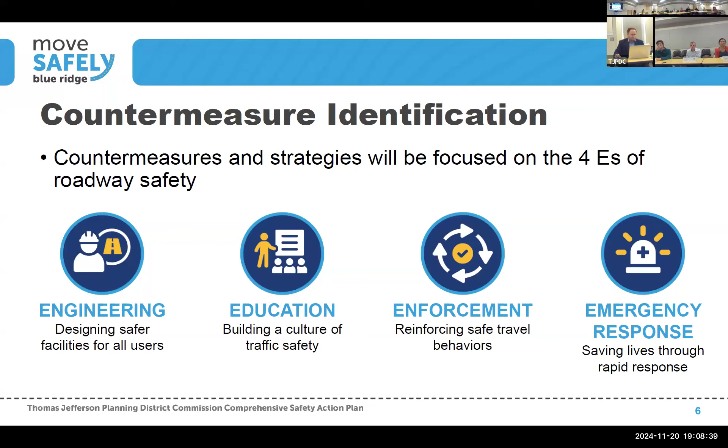The process is divided into 4 steps. The first step is identifying issues and opportunities. During the spring of this year, we completed this step through extensive public engagement. We conducted a survey that allowed residents of the jurisdiction to share their specific transportation concerns.

Step 2 consists of gathering data from site visits, which we conducted in each jurisdiction, completed in September of this year, so just recently. And now we're asking the public for feedback once more, but I will talk about this a little more in the next slides.

Step 3 will consist of development of targeted safety strategies based on the identified priorities in collaboration with jurisdictions. These strategies will serve as the foundation for the final step, which is the development of a comprehensive safety action plan, outlining specific actions and measures to enhance transportation safety in the region.

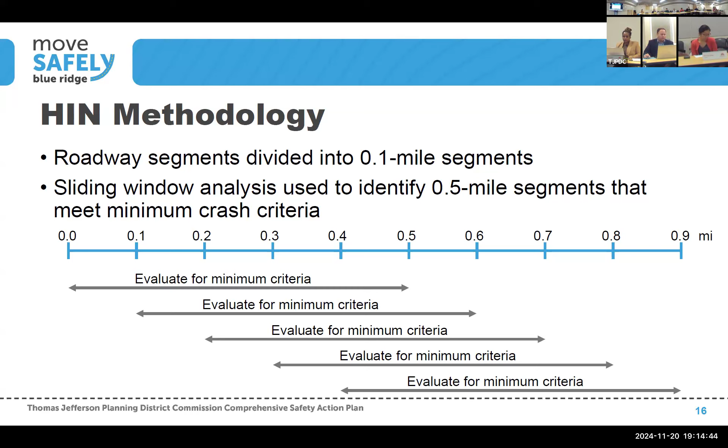In the next slides, I'm going to talk specifically about Albemarle and Charlottesville. But before that, I want to talk about what the terms mean. The terms you see on the screen are 2KA, 3KA, and then there's 2KAB and 3KAB.

What those terms mean is they refer to different criteria used to classify the severity of the crash in the high-injury network. Generally, 2KA crashes include K, fatal, and A, severe injury crashes, involving at least 2 or more crashes within a half-mile segment. This represents a broader and more inclusive network where more crashes are counted.

3KA includes K, fatal, and A, severe injury crashes, but limits the focus to 3 or more crashes within a segment. This represents a more narrowly defined network, focusing on areas with a higher concentration of severe crashes. The same goes for 2KAB and 3KAB crashes, but in this case, the B represents minor injuries.

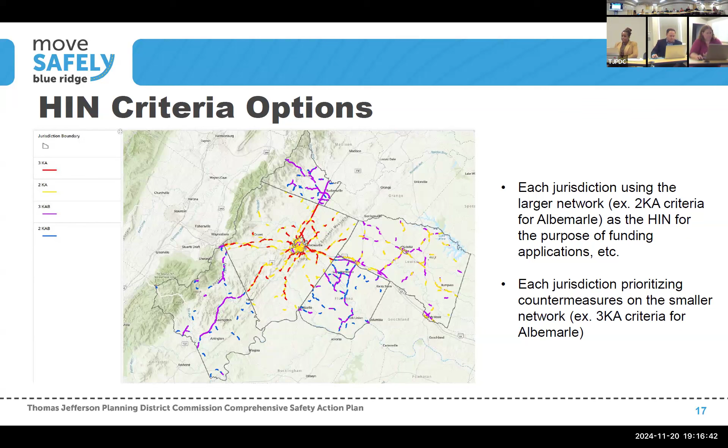We can look at the example for Albemarle County, where 3KA covers 3% of the roadway but accounts for 47% of the crashes, while 2KA covers 7% of the roadway but accounts for 72% of the crashes.

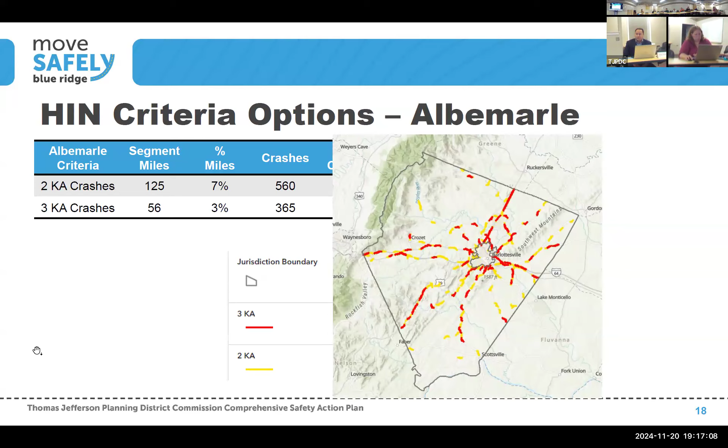Charlottesville is a little bit different. It does not have a 3KA. It has 2KA, but also has 3KAB. In this case, 2KA covers 14% of the road and accounts for 77% of the crashes, while 3KAB covers 17% of the road but contributes to 84% of the crashes.

I have a question. So here, each jurisdiction selects their own criteria for what's defined as a priority? Yes, I was not part of those meetings, but Sarah was. Those meetings were done with each jurisdiction separately, where both TJPDC, our consultant, and the jurisdictions agreed on which criteria they would use.

So in the Charlottesville case, is there any overlap for segments that are both 2KA and 3KAB? It seems like there could be segments that qualify for both categories. They're not mutually exclusive, right? They do overlap. But then what color would they have been coded? That's a good question. Unfortunately, I don't have the answer at the moment, but I can follow up on that. Well, all 3KAB crashes would be 2KA crashes, right? Well, they're not.

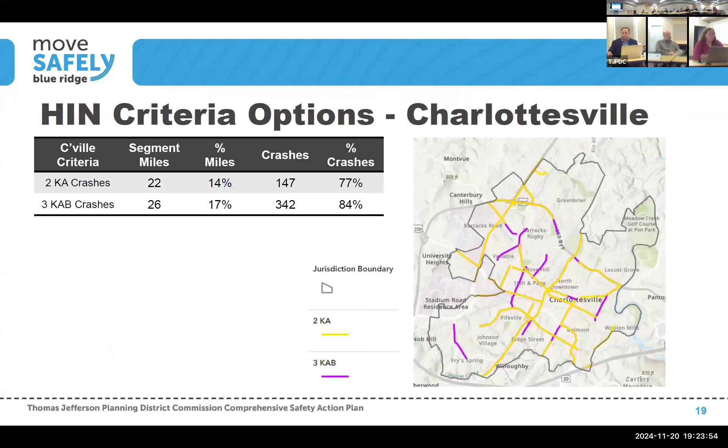How much of this framework is driven by the funding? You said this needs to qualify for, I think, Bipartisan Infrastructure Law funding. Yeah, so the goal is to give future opportunity for implementation grants, based on the comprehensive safety action plan. At the end of this plan there are certain deadlines: we have to have the draft safety action plan completed by the end of April, reviewed and finalized, and then by June 30th it has to be approved by the boards. Then by the end of September, we have to submit the final action plan to FHWA.

And a follow-up question, if you don't mind. With that in mind, how much does this effort overlap with parallel efforts in each locality? Or is this basically what carries the water for broader efforts like Vision Zero and pedestrian safety? Are those in parallel, or is it like a Venn diagram, or does the other thing not happen?

Okay, currently we're looking at two studies, or three studies, in the Charlottesville MPO area. One of them's in the city. Let me go down the list.

The first one is the Hydraulic 29 Emmet Street interchange, right there, where we basically haven't studied that. It's been studied before, but we didn't study it with the Solutions 29 package of projects. So we're pulling that out as a separate study.

We're going to look at it to try to see what we can do to solve that issue at the interchange. We also had to pull the Angus Road intersection out of the previously funded study, so we're going to look at that again. And we're also going to look at Hydraulic and 29.

We're also going to look at that corridor from Barracks Road all the way through Hydraulic. That study shows up as a high safety need corridor, so we want to look at that to see what we can do to try to address the multimodal aspects of that corridor, to see if we can provide any recommendations for improvements.

The second corridor is from Hydraulic north to Woodbrook. Greenbrier and Woodbrook are two very high crash locations, as well as there being a number of high priority, high crash location segments on that corridor that we want to look at to see how we can come up with a method for improving that.

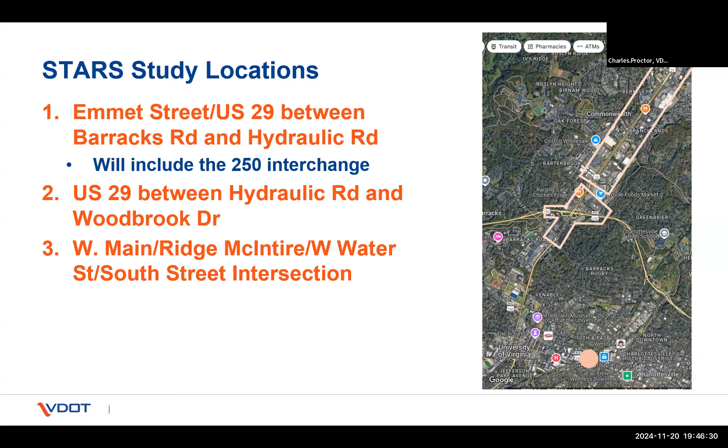In some instances, almost all the way to Old Ivy Road, which is significant. So we want to figure out how we can better solve that issue. This is also one of the locations the county was considering looking at for the Safe Streets for All grant. In talking with them, they're mainly looking at more short-term, low-cost solutions, whereas this would be more looking at the long-term interchange improvements that might be needed at this location to actually make it function better.

It's been looked at a couple of times. We funded it and broke it up into different pieces. I think the original concept was looked at in round one, but the cost was almost $200 million to do the interchange improvement. So we want to relook at it to see if there's anything else we can do here that's less expensive and still provide us the same level of service we've had in the past.

And then the other one is the 5th Street interchange. It was submitted this round. We're still going through the process of scoring it and validating the application. The cost estimate was pretty high, and it ended up costing more than what we thought it was going to be. So we're concerned that it's not going to get funded, so we wanted to relook at it.

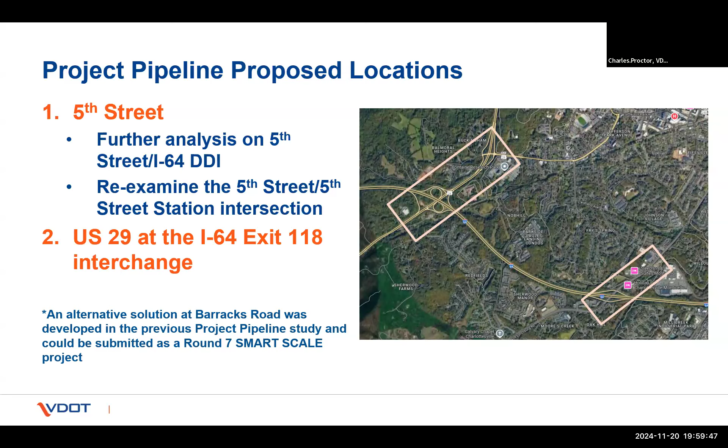I think that's it, I think we went through it. Anybody got any other questions about this one?

You said the shared use path was going to be west of the bridge? Yeah, that's what we're looking at right now. It runs down the middle of the bridge currently. The county's got a shared use path coming up on the north side that's coming across from Old Lynchburg Road, and they're going to connect to the shared use path we're going to build on the west side, and then you can cross at the interchange. On the south side, the facilities we're tying into are on the west side of 5th Street. So on the north, once we get to the north side of the bridge, we're going to have to cross the road, and we'll cross at the interchange.

Isn't there a current path? Yeah, there is a current path down there on the east side of the bridge, which connects to the 5th Street Station shopping center. Okay, and we're going to basically tie in there's a trail that runs just north of the shopping center where the Holiday Inn is. There's a trailhead that comes in there. We're going to start there and go south, then cross the road at the interchange, and then cross the 64 on the west side, and then continue south on the west side of 5th Street.

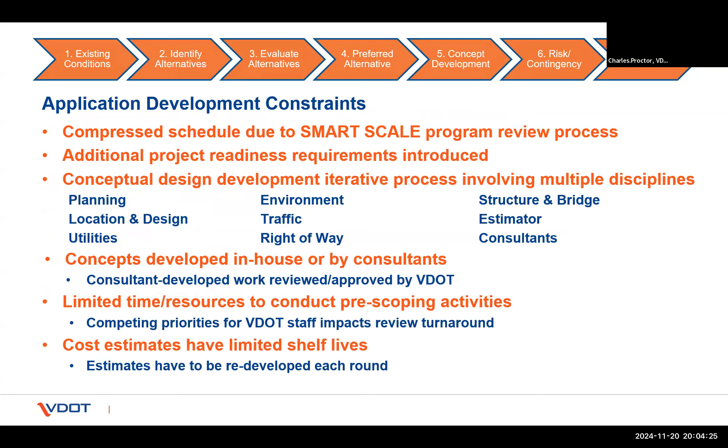This is the process we went through, which is standard for a STARS type study. We did a compressed schedule, and that's one of the reasons we ended up not being able to look at a different alternative, because by the time we got to the cost estimate, we didn't have enough time to go back and make any changes to it. But basically everybody that's included is the same as what I outlined in the other studies.

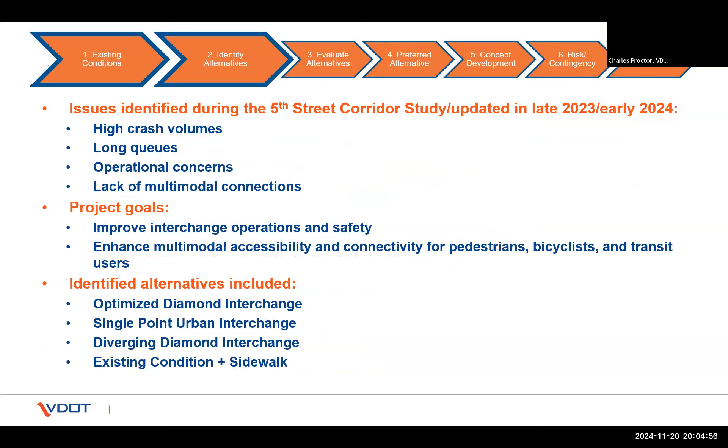Here are some of the issues that we identified: high crash volumes, long queues, operational concerns at the intersections. It was causing queuing back onto 64. So the goal was to basically fix the safety and operations and also provide multimodal access across the bridge for pedestrians. We looked at the 4 different scenarios that you can see at the bottom during the study.

We had some changes. Here are the different things that we looked at and the differences between the various alternatives. The diverging diamond was identified as the preferred alternative, so that's the one we moved forward with.

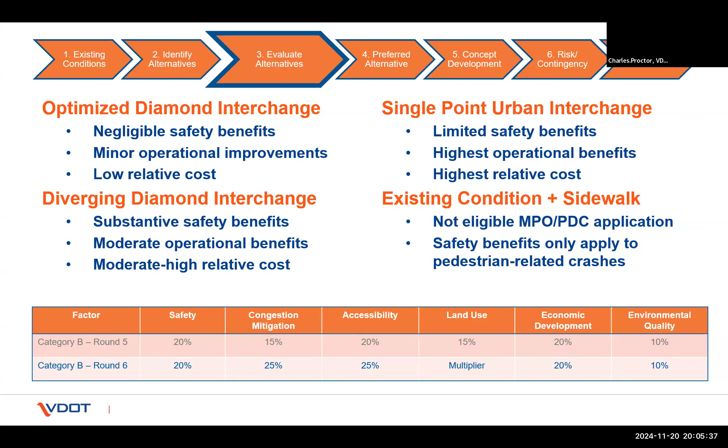And the bottom shows the changes in the smart scale scoring methodology from this round. They changed it so we don't get a land use score. It's a multiplier, so it doesn't have as much weight as it did before, so the shared use multimodal effects aren't as impactful as they were previously.

Basically, what we're proposing to do is cross instead of going down the middle. We'll just cross the interchange and then go down the west side of the bridge, parallel to the bridge. By doing that, we wouldn't have to do as much reconfiguration on the bridge itself, and we minimize the impacts to the existing bridge to almost a minimal impact.

We've done this before. When we did the bridge at Zion Crossroads, we basically did the intersection modifications on either end, but we didn't even touch the bridge at all for that one. I'm hoping we can do the same thing here. We might have to do a little bit of median modification to allow for the crossing movements to occur at either end, but that's going to be about it.

How do you cross from one side to the other with the light? There will be a signal at these locations, so you could cross at the signals. Right now it's signaled on the top side on both sides, but when the signal stops, everybody stops, and we could put the phase in for that crossing movement on both sides of the road. So it'd still be a two-stage crossing, but we can stage it so that you have the control and don't have to worry about traffic.

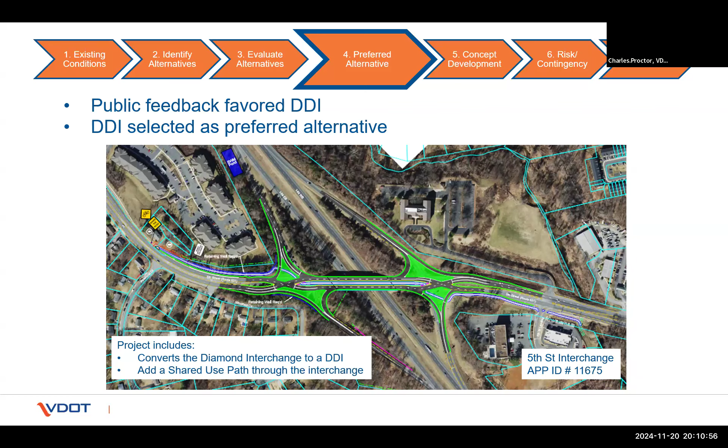And this is the current estimate for the project, 70 or 79 million, which is way above what we thought it was going to be, just to incorporate the extra cost for the bridge replacement.

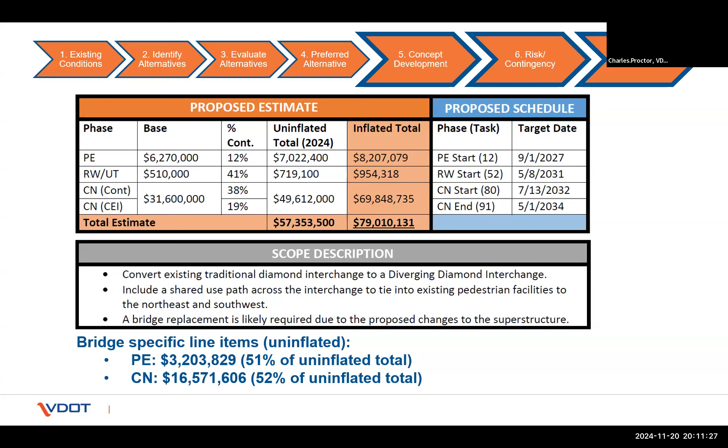Like I said, when we went through this process, this is sort of a timeline. We started it in the fall, got to the preferred alternatives in the spring, and started the final evaluation in late spring. By the time we got to the cost estimate, we were already in July. We didn't have enough time to go back and make changes to the preferred alternative and get public buy-in, so basically what we got is what we got.

So what I want to do is go back and look at another alternative for this bridge that would reduce the cost.

How common is it to put the multi-use path through the middle of the DDI? That's originally, when it was first designed, the first one in the country, in Missouri, that's where it was placed, in the middle of the road.

I've never been through one, but it strikes me I would probably prefer not to go down the middle if I was walking or biking. But I wonder if this alternative is maybe different. It's got barriers on both sides, so you've got Jersey barrier on both sides. It's not just a sidewalk in the middle of the road. You've got directional traffic on either side, but there's a barrier between the traffic and the pedestrian facility. It's a shared use path.

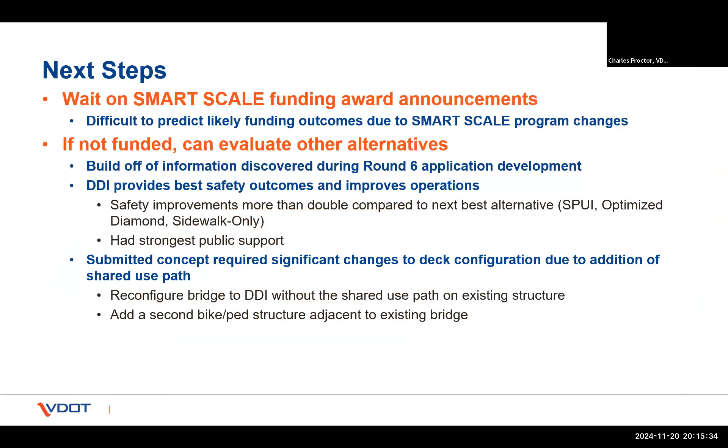We didn't have enough time to go back, because it takes about 3 months to get from public outreach to the final cost estimate. So that's basically where we're at. We're going to look at another alternative with the DDI, with a pedestrian bridge on a separate structure, and go through and resubmit it and reanalyze it.

That's a minor detail, but we still have to go through FHWA and get their approval, and that's going to be the bigger thing. Any questions other than what we talked about?

This is off topic, but do you know when they're going to complete the project down at Red Hill Road and Scottsville Road?

I'm not sure which project this is. They're working on the bridge and the stream bank. I guess that would be the Hardware River there, down on Route 20 south in Carter's Bridge area. That might be a bridge, are they doing the bridge? That's a bridge project, I'm not familiar with that project, so I can't answer that question. I just wondered. They usually go pretty quick, but I don't know for sure how long that one's going to take.

All right, this is the pipeline study that we're wrapping up. We're still trying to finalize the final cost estimates, and then we should be wrapped up. Basically, this is the preferred alternative that ended up coming out of the study.

Extension of the accel and decel lanes on the ramps on the north side of Old Ivy Road, to facilitate longer ramps so that we don't have queuing back out onto the mainline facility.

It also includes a shared use path along Old Ivy Road, I think on the south side, including a multimodal bridge across the bypass, parallel to the existing bridge that's there. There's also some reconfiguration of Franklin Street and the ramp at Old Garth Road and Old Ivy Road, so they're one-way streets instead of two-way.

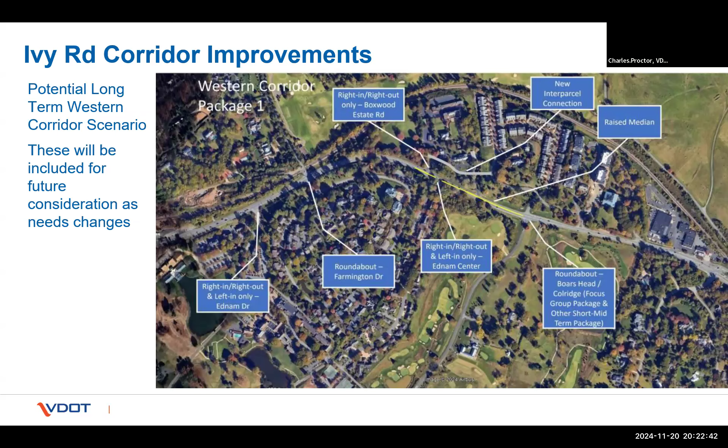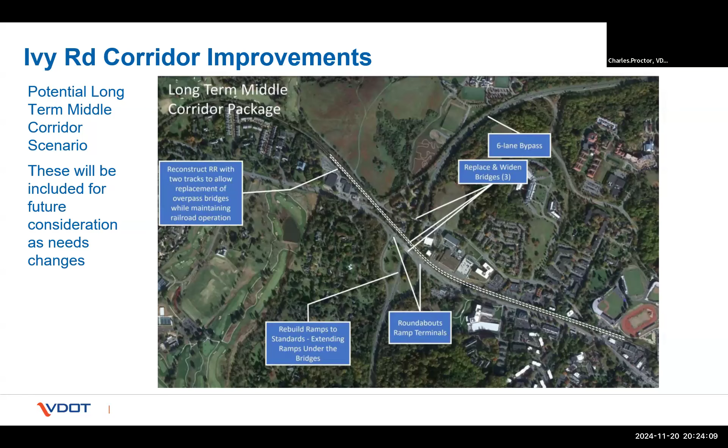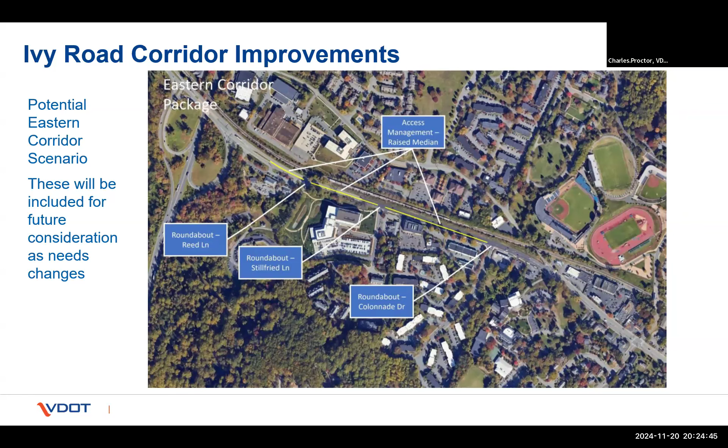And that's pretty much it. Right now we're trying to wrap up the study. We're doing some planning level cost estimates. Once we get those in, we'll finalize the report and we'll be done. Any questions?

So once the preferred scenarios are selected, this has to be submitted for funding somewhere in order for it to actually be put in place?

Okay. Yeah, for smart scale or something like that.

Because of the changes in regulations for smart scale, the regional bodies can only submit interchange projects, capacity and expansion projects, or the entire recommendations of a study. So we wanted to craft the recommendations so it would be something the MPO would be eligible to submit, and it wouldn't be too costly for them to submit it.

Did you say there was a multi-use path? Correct. It's this dotted line in the middle of the screen. It runs along Old Ivy Road from the underpass at Ivy Road on the east end all the way to Old Garth Road intersection.

So in the long term, I'm just curious about the long-term recommendations on either side of that. Did that include tying in multi-use paths? We just looked at this portion of it. With the Three Notch'd Trail study, I'm not even sure where they're going to run the trail, so I didn't want to put too much in without knowing where they wanted to run it.

Because once you get to the other side and start to go west, you could have a different alignment than what we would choose. The east end is going to tie into the existing sidewalk, and I don't know if there are bike lanes on Ivy Road to the east. But the underpass has only got a 6-foot wide sidewalk, I think, because that's all we can fit underneath the underpass on the east end.

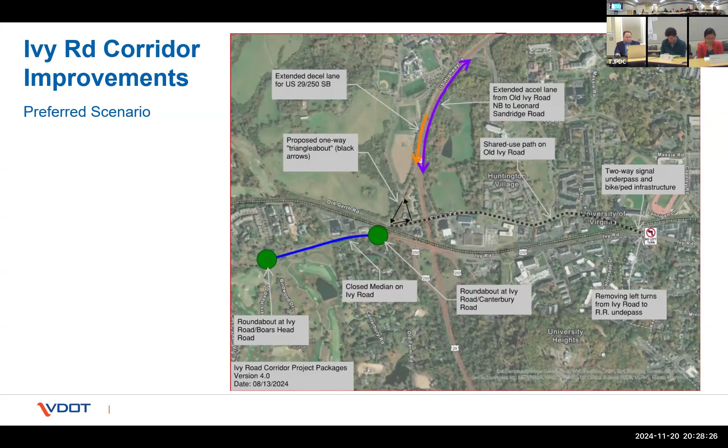We'll move on to any final comments from members of the committee. If not, I have one reminder about the Move Safely Blue Ridge survey. It was covered on 29 News as well. I can provide the link in the chat for that. Do you send it out through email? It's not easy to access the chat. Sure, I can send that in an email tomorrow, along with the Facebook post for the survey.

Any matters from the public? I don't see any members of the public online, and nobody here, so.

You skipped one item, I think item 6 before the round table. Well, no, the round table was 8. Yeah, but we did skip 6, and the numbers are off. Yeah, it's supposed to be 7 and 8.

I guess the one sentence is the federal functional classification. The policy board approved last month the proposed changes to the functional classification, which means it's now in the hands of FHWA. Yeah, just for the record.

Your next meeting, the CTAC, will be January 22nd. This will be an all virtual meeting, as we talked about last time.